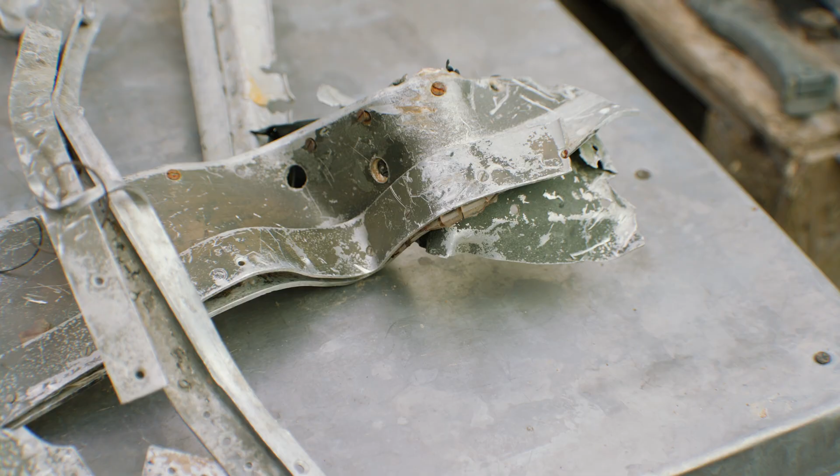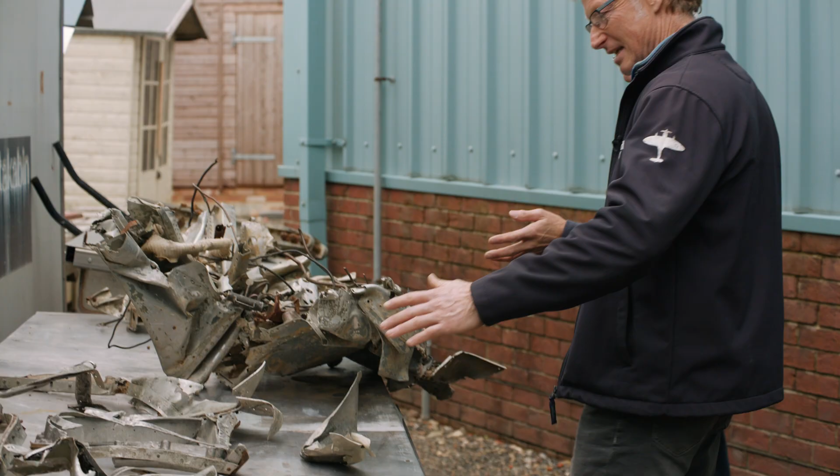If you look out here, Parky, we've got just a few bits. We've got bagfuls of it round the corner, as they say, but there's a few bits we've just laid out here of the recovered salvage parts of MJ444, bits which will be recognisable to you, hopefully. As you can see, you've got the complete surround here of the front armoured screen, the fairing with the de-icer bar, the fairings on the side. Look at the paint on that. It's amazing, isn't it? Perfect, isn't it?

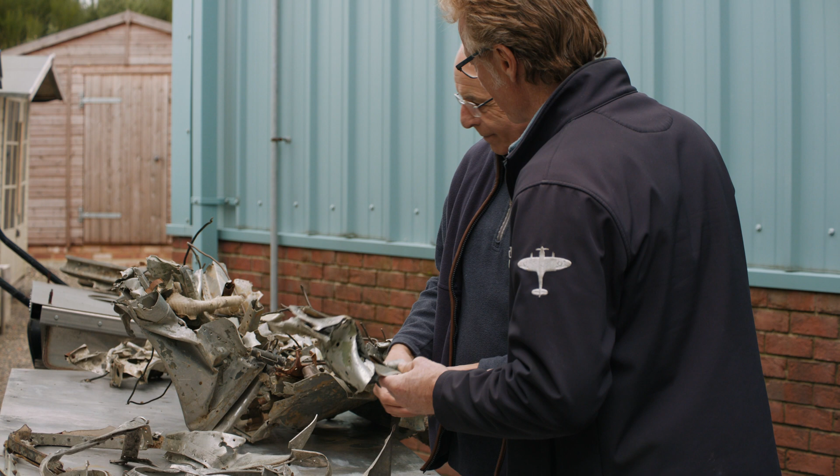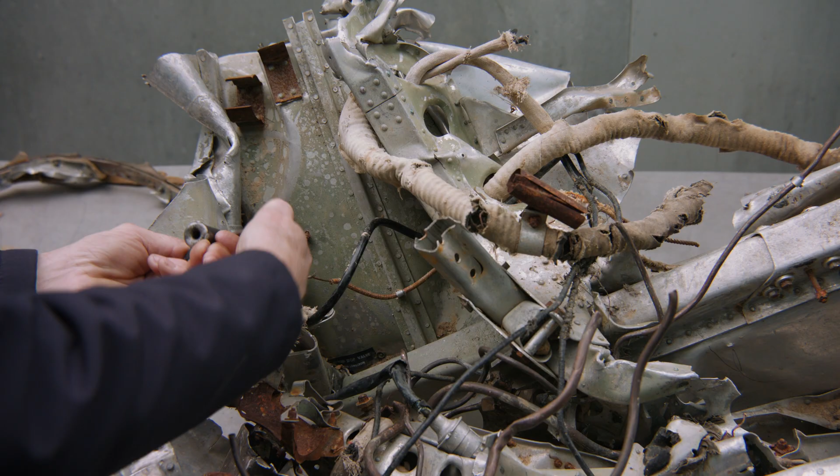Incredible. And some of the fixtures and fittings on here, like the armour plate there, you'll be able to use. Yeah, we'll straighten that end out. It's armour plate. It's almost auxiliary tertiary structure by today's standards. No one's going to be shooting at you. So things like that will go back into the rebuild. And here this is the strap. That's the harness release. That still works. The harness release still works. Yeah, that'll all be taken off. Reuse. Yes, we've got all that.

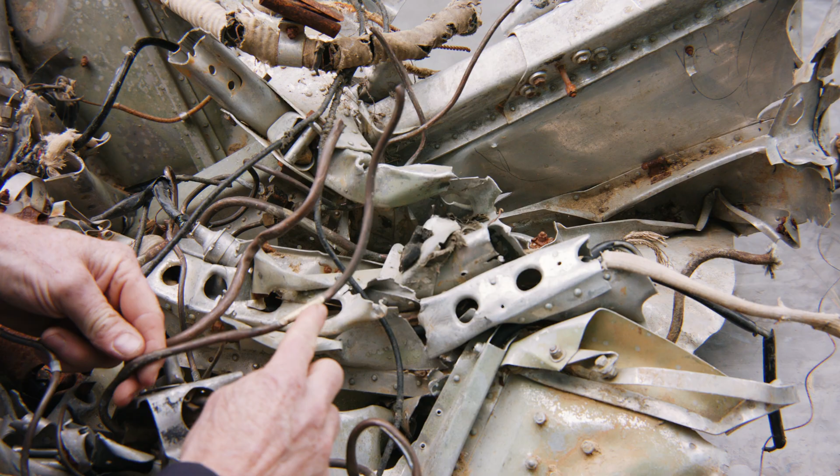We've got parts of the de-icing system controls. There's clips, brackets, mounts, the bushes from where the two bits of datum longeron meet. We'll take that apart. Go into the rebuild, rather than remake bushes. These are perfectly good. And this little plaque here, for example. Yeah, we won't be doing the systems, but when it comes to that, these little plaques can be desoldered and put back onto the new things.

Even bits of the top hat structure like that will all be stripped off and reused for the cockpit side stiffeners. And there's no reason why you wouldn't. It's in perfect condition. There's lots of little plates down there, stop valve things. All those will be taken off and reused right the way through this and the rest of the structure. This is the bit of the bulkhead. Some of these parts you can see we've already taken off. Some have already been drilled off recently or are already incorporated in the aircraft, into the structure. And more bits will be when we get to that point as well.

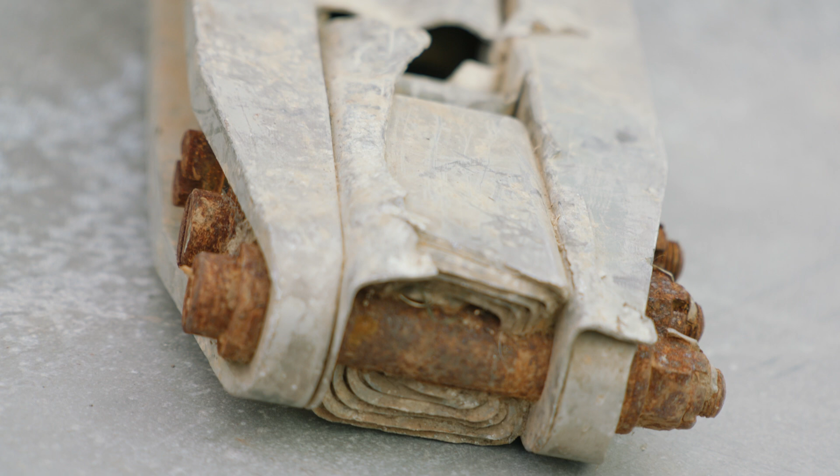And then that is... This is a piece of the original carry-through spar. It is, and you can see the laminates there of how the actual wing spar is made. That is the original, you can see exactly where it got its strength from. And then the 3 bolts, and then there would be 4 beneath that. Yes, and on the upper spar, we have managed to get out some of these spacer blocks, which again have been put back in already into the replacement restored frame 5 that we've already done in the jig. Just so wonderful to see, isn't it? Well, it's all about trying to incorporate as much originality and authenticity as we possibly can.

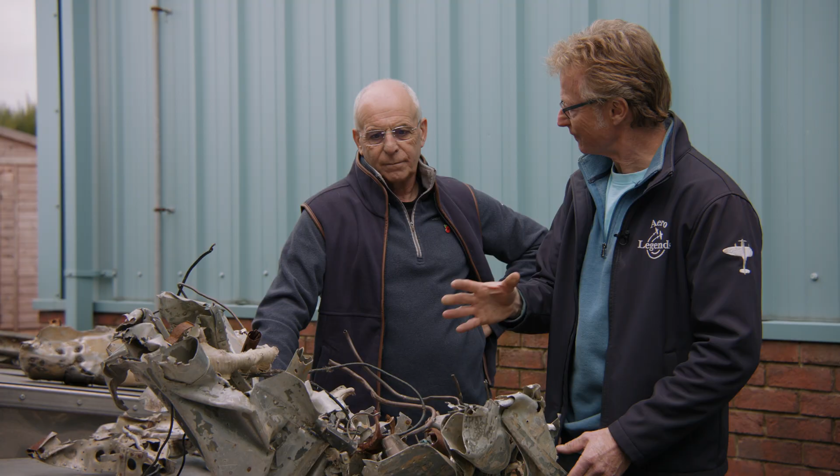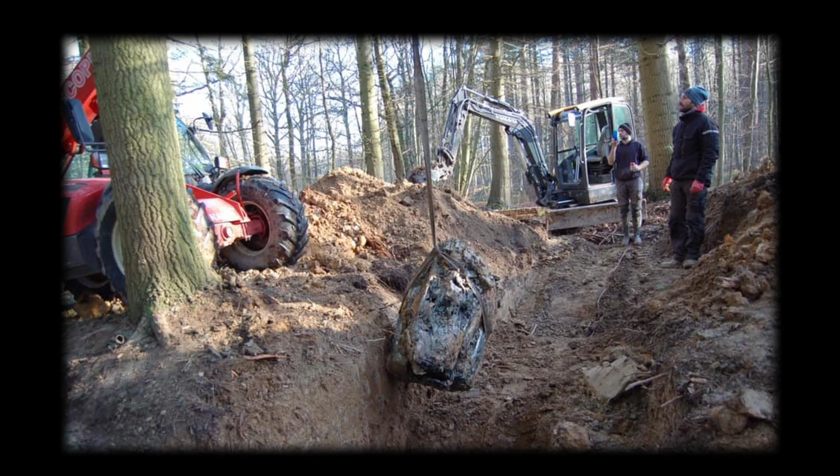I can see here, Steve, there's Belgian mud on the panel there. There is indeed, residue. And MJ was in the ground for, we think, 73 years in Belgium. Do you know whereabouts? Well, it was not far from where it ended up in the museum, which was at Florennes, where they have a Spitfire 14. The excavation was carried out by a local guy who lived in a village and was told about an aeroplane. He didn't even know it was a Spitfire, let alone MJ444. He carried out the excavation. I won't use the word amateur, but he didn't really know what he was doing, didn't know what he had.

Luckily, the guy that was involved with the display in the museum got to hear about it, retrieved the parts, and then realised what he had. Then it became slightly more public knowledge. A very good friend of ours, a good contact in Holland, who knew the guys in Belgium, then got involved, and through various phone calls, emails and negotiations, we managed to end up with the remains that you see today, and that has led to where we are. Yeah.

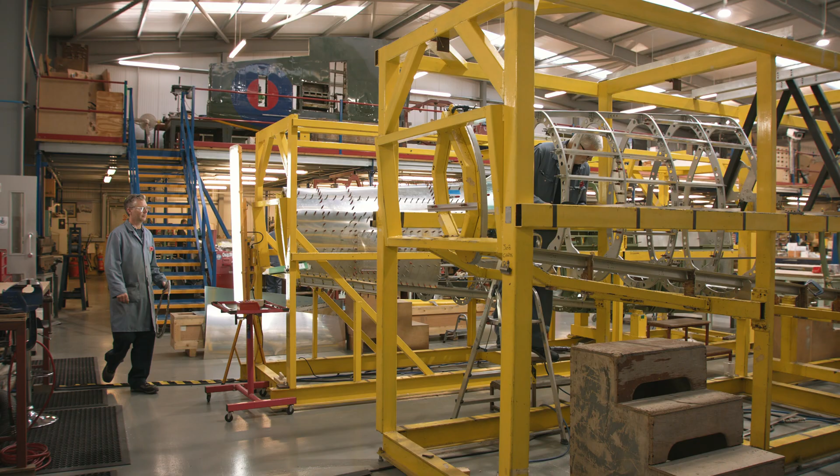So Steve, here we are inside the noisy machining shop where they build Spitfires. So tell us about the place. Well, we've been in this hangar now for just over 10 years. We were originally on the other side of the airfield, and prior to that we've been in smaller and smaller industrial units. We started in a little 700 square feet one many years ago, back in 1986.

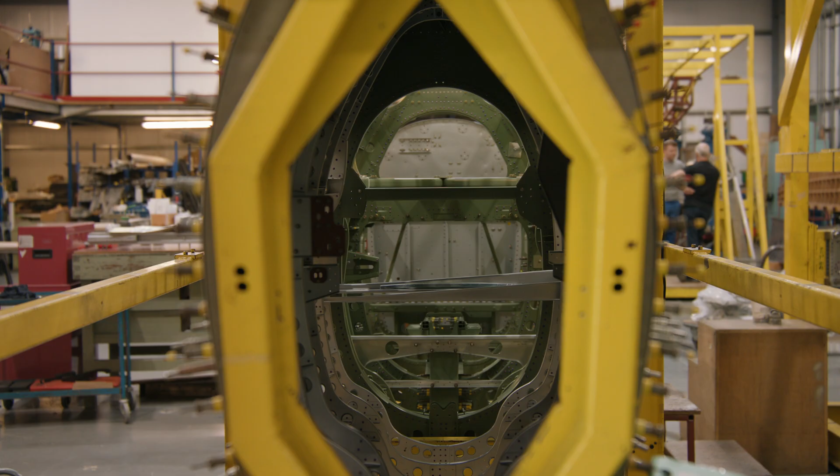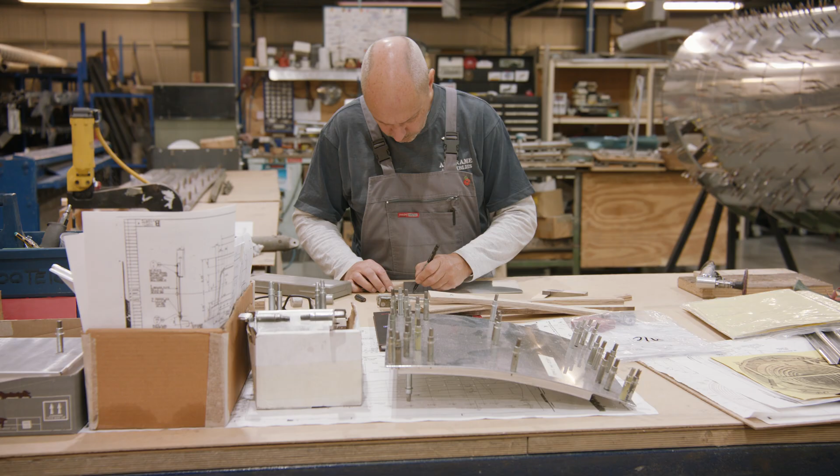And as you can see, we've got a couple of fuselages on the go here, wings over there. Just to make a bit of a change to the normal pattern of stuff, we've got a Typhoon fuselage going together. Yeah, it's great to see a Typhoon here as well. Well, it's something different. I mean, we don't just do Spitfires. Predominantly it's always come back to that over the years.

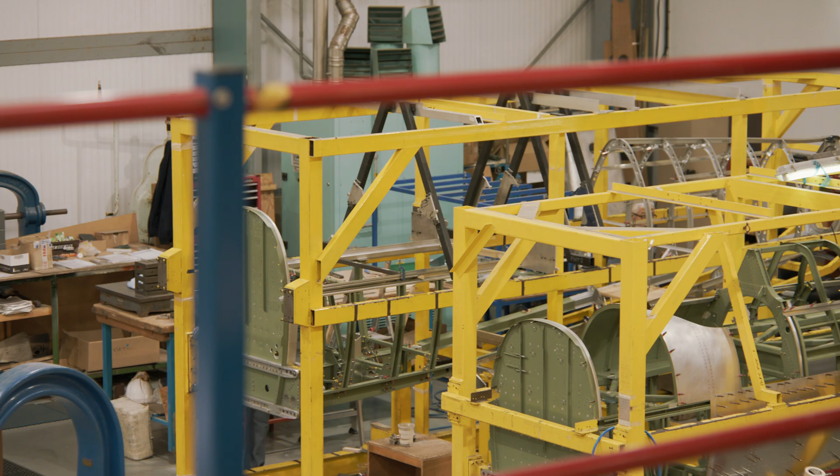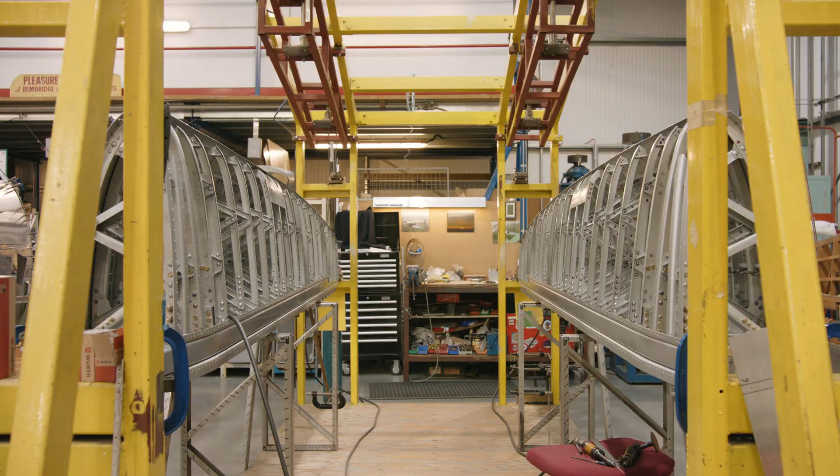I guess MJ444 is down there somewhere. Which one is she? It's the second jig over from where we're standing, just behind the slightly more complete one, which we're doing for another client, started earlier on in the year. And the leading edges of the wings of 444 are over there. And then the fin unit is just being done down here as well. So we've got the three major components going on, with a few loose parts scattered throughout the workshop on the fitters' benches. Should we go and have a look? Yeah, let's go down.

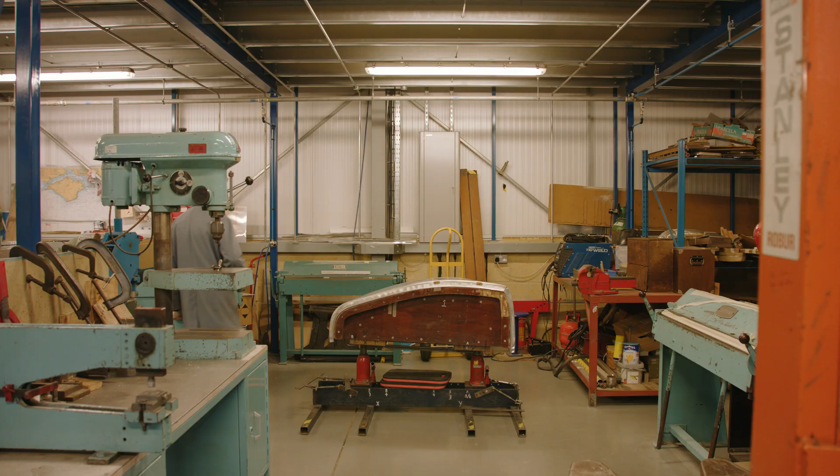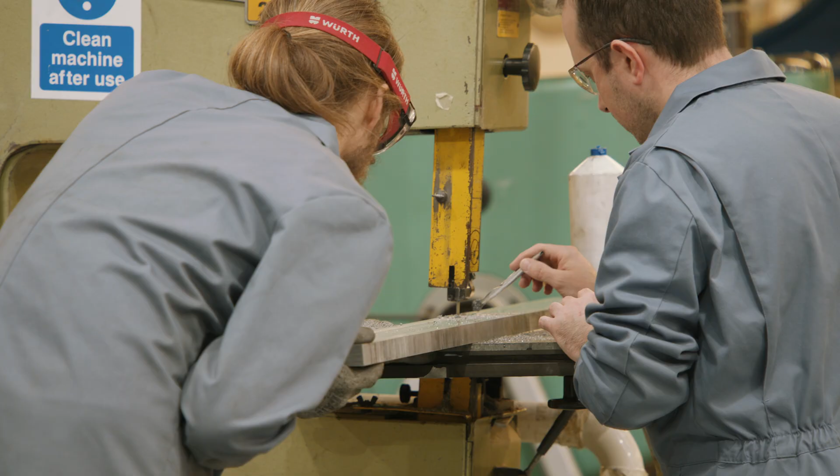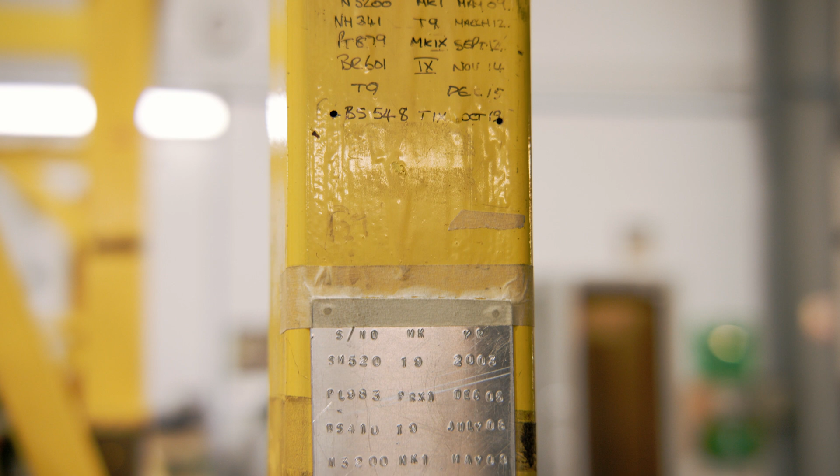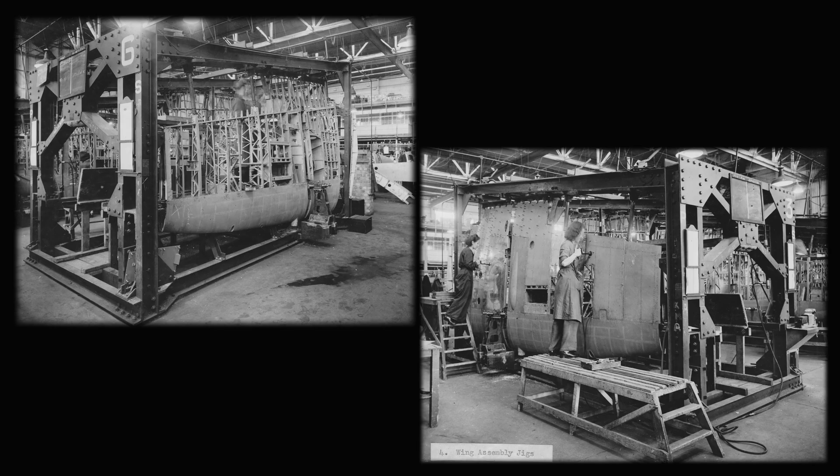So NH341 Elizabeth was built on this jig? Yeah, one of your other aeroplanes, we did that one back in March 12. Yeah, that long ago. And this jig, this system of being built was pretty much exactly as it was in the war, same principle? Same principle, oh yeah. If you look at some of the old black and white Supermarine factory photographs, there were rows and rows of these jig fixtures. This is an 80-year-on leap into the future, but it's exactly the same methodology. And you'll also find on the other jig your other aeroplane.

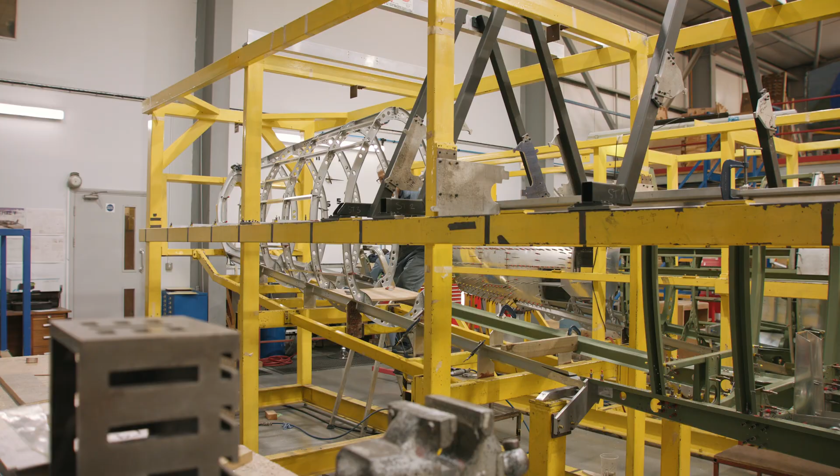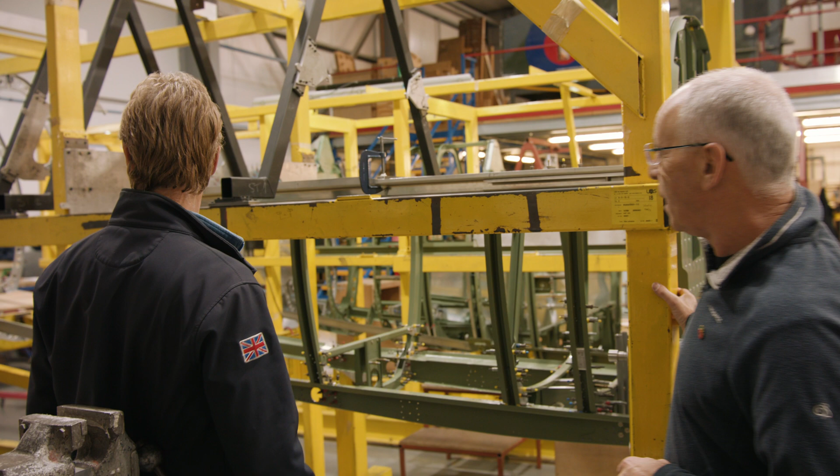And here she is. She's definitely taking shape. Yeah, it's just starting to get the basic frames, it's a Spitfire, can't you? It's just starting to get that form now. Yeah, it's not really until the skins go on, as they are with the next door one, that once you can't see through it anymore, then it starts to take the form far more.

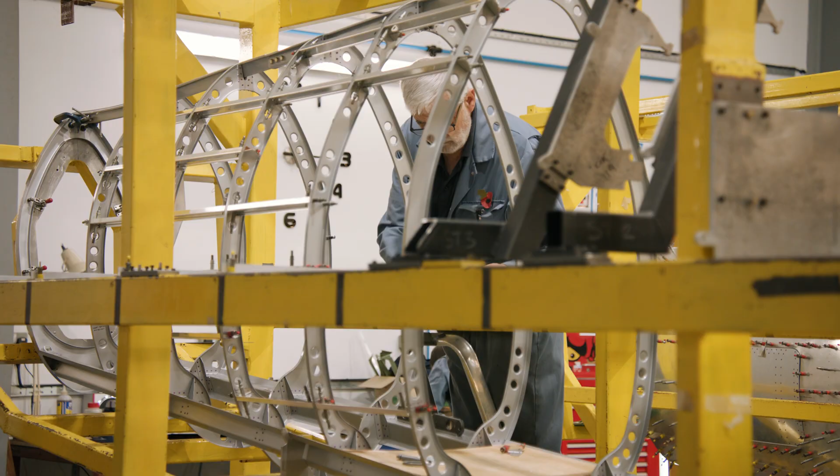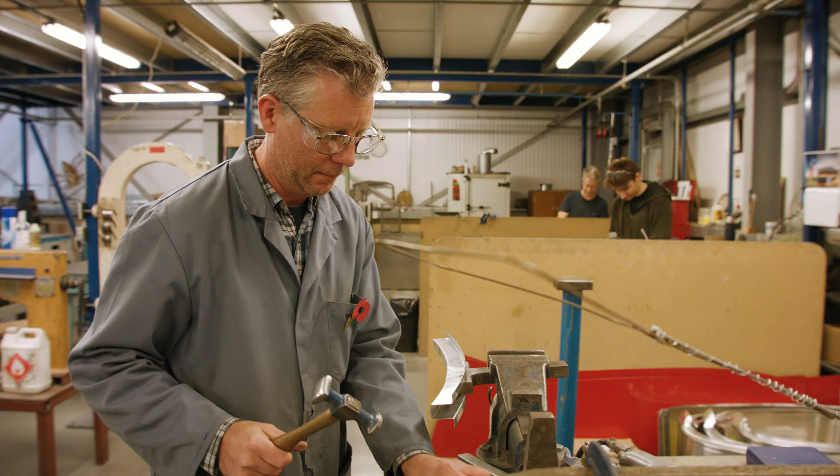And how long has it taken for her to get to this stage? She's only actually been in the jig probably for about 3 or 4 weeks since we got frame 5 in. But the hours, obviously, the last few months have been getting all the frames made separately in the layout boards on the bench, because all that has to be done as preliminary before you can start to load the jig up with the frames.

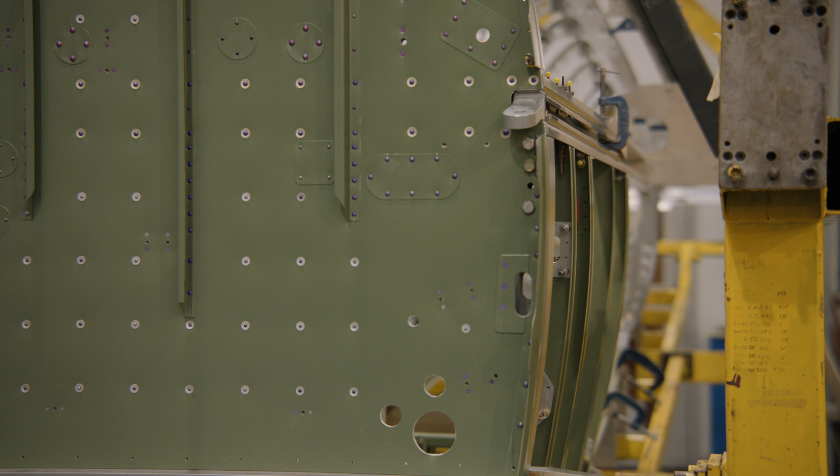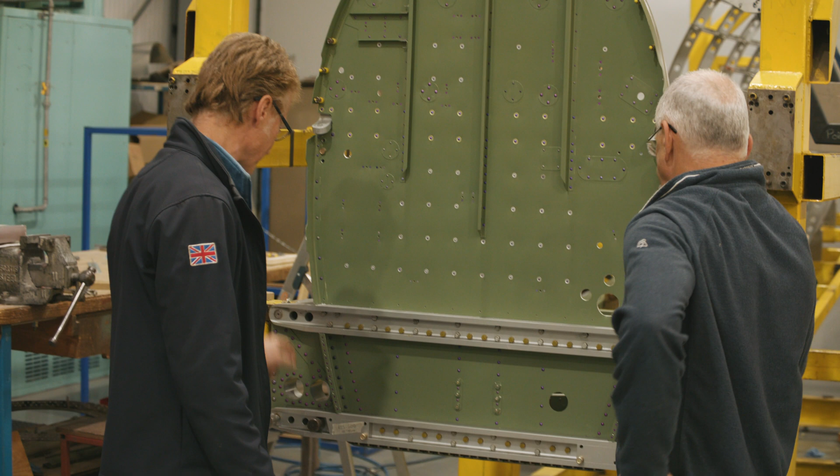And then frame 5, the heart of the aeroplane, the main bulkhead. Everything centres around this frame. Number 5 frame, the wings attach, the engine bearer picks up at the front, so everything really hinges around the heart of the aeroplane. And it never ceases to amaze me that 7 nuts and bolts hold the entire wing in place. The upper spar and the lower spar of the wing hold on by 7 bolts. It's just a big multi-pin joint that was amazingly effective.

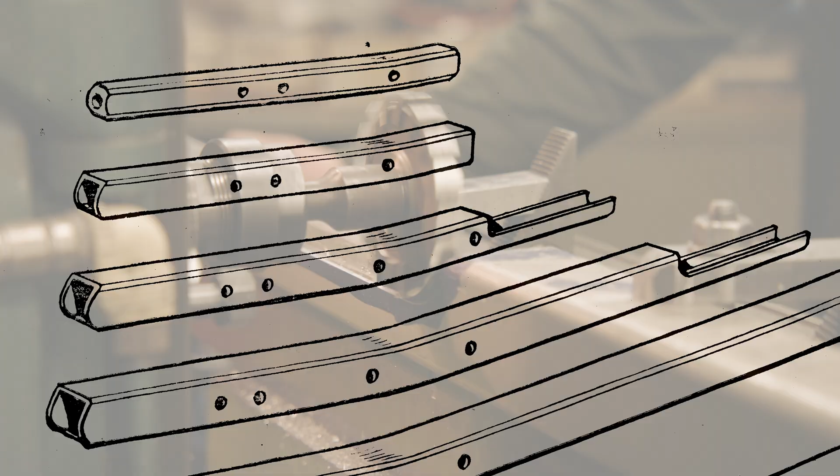Amazing, and you think of the weight of the wing and then multiplying that weight by 6 times if you pull 6G, is held on with such a clever design. And a lot of the secret of it is in that multi-layer telescopic leaf spring type spar, which was really the genius that Mitchell came up with, clamped onto this relatively simple joint, and historically Spitfire wing failures were tiny. You hear stories of Messerschmitt 109 wings collapsing, but not this.

This is such a strong joint. I remember Dick Melton at Charles Church Spitfires telling me years ago, the frame 10 joint at the back is just a single pin. On more than one occasion, that pin had been missed out in maintenance and major servicing, and the aeroplane had flown and had been okay. Just held on by the front. So nothing holding the back of the wing. People had noticed it moving and thought we better look at that. No pin. So it says something, doesn't it?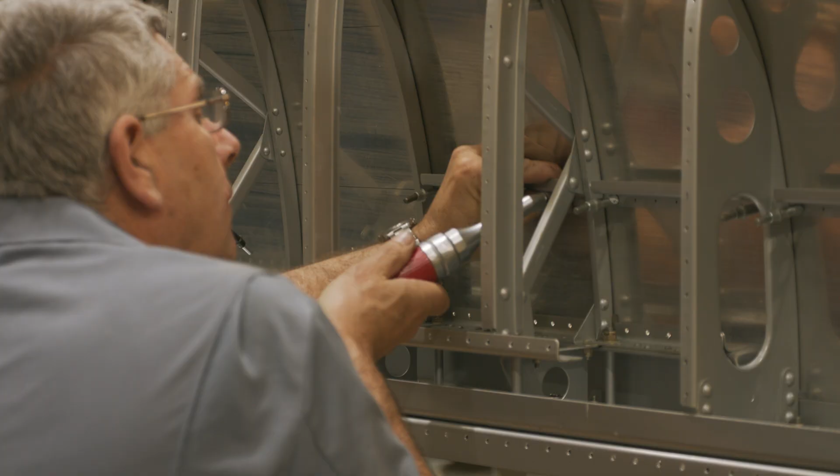It really does. Should we go over and have a look at the wings, where they get bolted onto? Yeah. So here the wings are, Steve. Yeah, these are the D boxes just going together now. We've just finished doing the leading edge skins, the big double curved skins. They look a bit weird at the moment because they're actually upside down, but they'll be turned round.

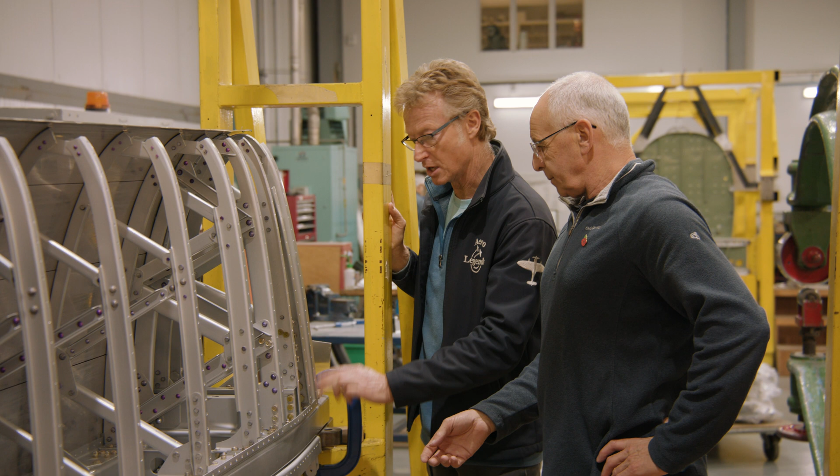And this simulates the frame 5 that we saw on MJ. It does, yeah. And then these are the lower and the upper wing spars. These are ground jig plates, which replicate the bottom of frame 5, the bulkhead. And when it's turned the other way up, in a couple of weeks' time, all of the holes will be filled. This is just a holding device at the moment. They've got to be fairly accurate. Oh yeah, extremely accurate, which is why they're ground plates.

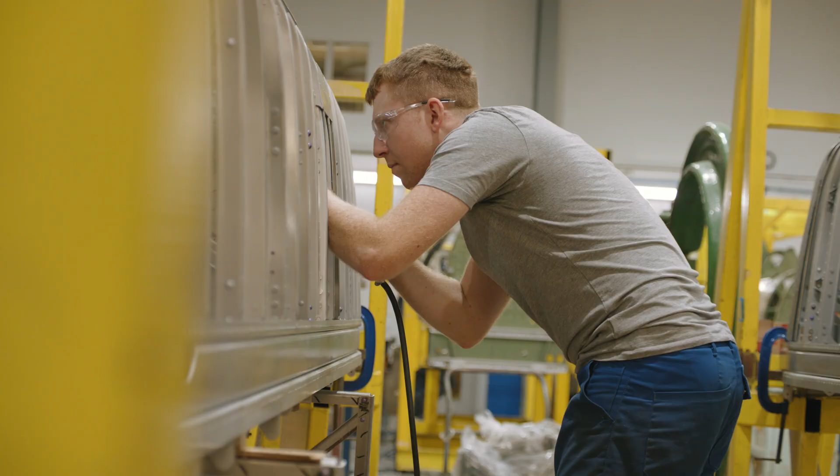How long has it taken for these leading edges to be? Both of these have been in the jigs now for probably about 4 months. Yeah, a lot of work. Well, it's such a complicated design, isn't it? With the beautiful elliptical wing. I mean, we try and carry a set in stock, but just to actually make the spars, which is a very complex process, it's about 3 months' work to get them cut in, to get them in. And we are the only company in the world that actually do Spitfire spars, approved to do so. It's a very lengthy, complicated process.

And the strength of the spar actually gets thinner because there's less. Yeah, the laminates, the cutouts go. So it's heavier, stronger here. You start with, at this end, the 5 different size tubes interlocked with a solid bar that goes to here. So at the dihedral it locks, and then as it goes staged outwards, the cutouts cut out. So I think I saw one over there.

It gives it the flexibility, as we mentioned earlier, almost similar to a leaf spring effect. Immensely strong, but very flexible, and the secret of the aeroplane. And look at the thickness of the wing compared to other aeroplanes of the period, which were almost double. Hence, it was so fast. Exactly. Yeah.

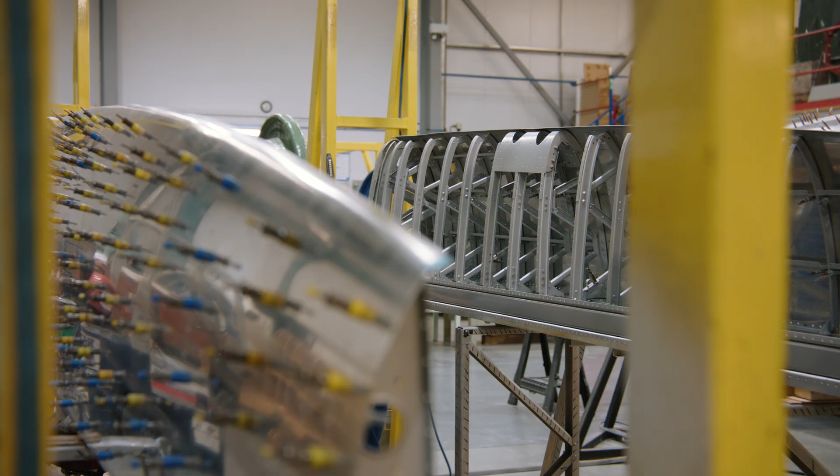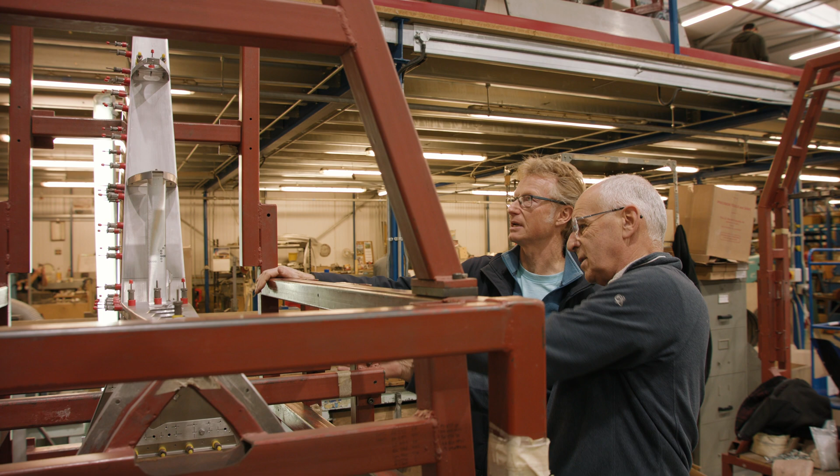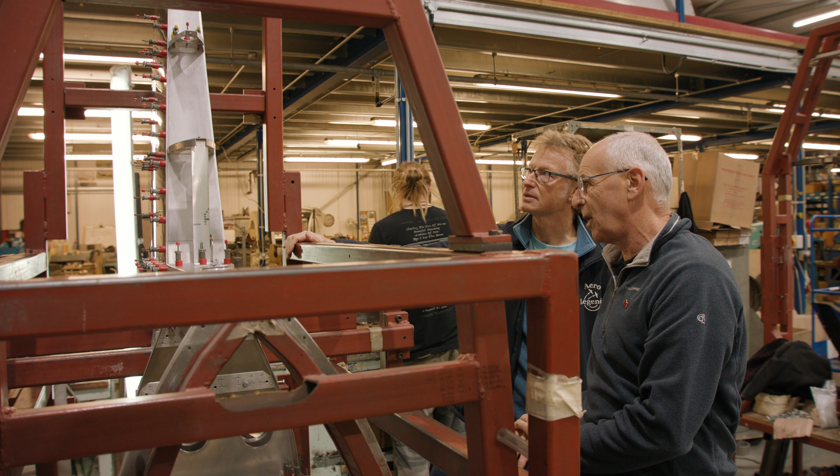This is the vertical fin unit of MJ, which is just starting to go together in the jig. There's a lot going on the fin unit. People tend to underestimate. It has to fit onto the fuselage this end, rudder has to be all set this end, tailplanes in the middle. So a lot going on in what people would think is a fairly small part of the structure, but quite a complicated one. But we did have a brilliant idea earlier on.

Yeah. So as this is open and is being worked on currently, we thought perhaps you could drill a few holes for us. Me drill the holes in the... Have a go, yeah. Is it expensive? It's not that expensive, and yes, it is expensive. But our thought is, what could possibly go wrong? I'd love to. Give it a go. Steve, could you look after our esteemed visitor?

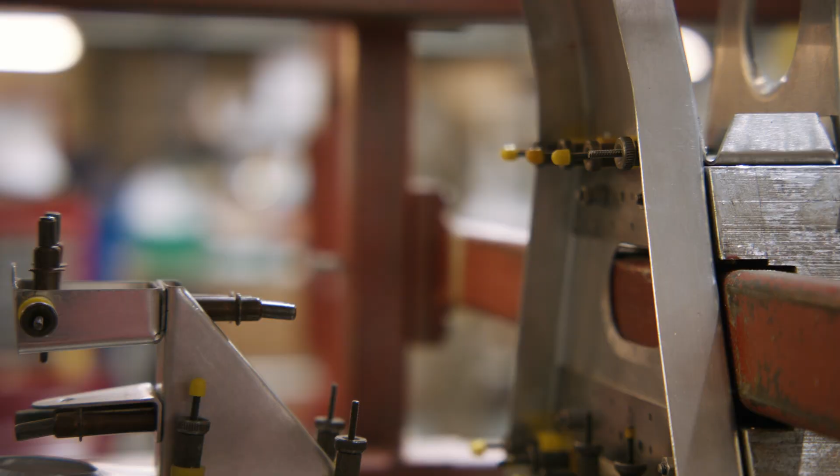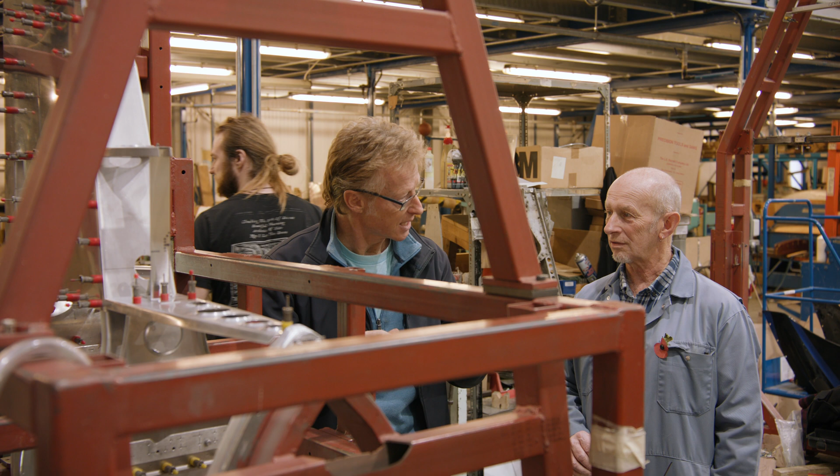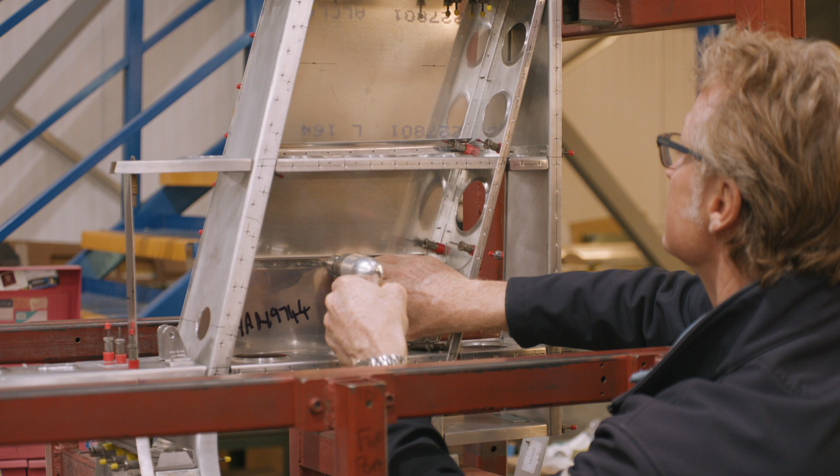That's it, now you can put the other half a dozen in. And you can do it all in one now? Yeah. I guess if you're feeling confident, you can do the next one up.

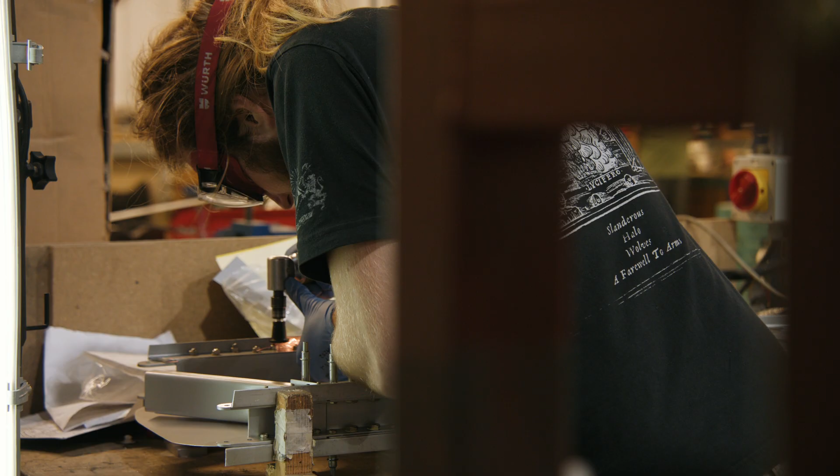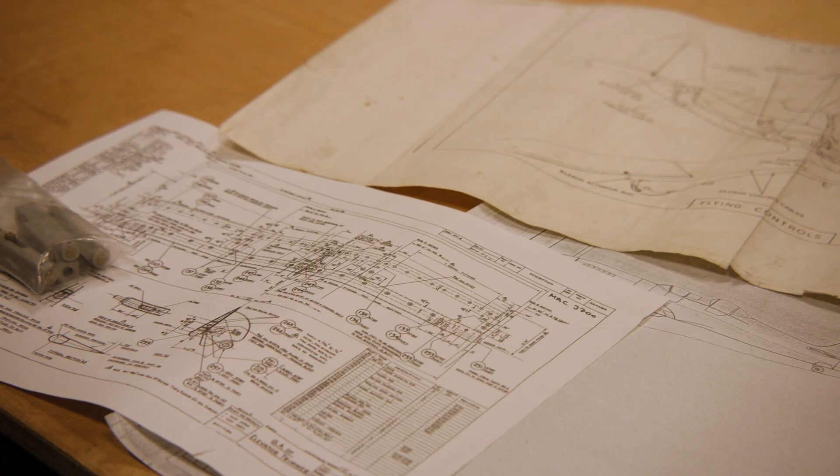Would these be referred to by the guys on the workshop regularly? Absolutely. Everything we do. Although we've got tools, layout boards, jigs, templates, we always check to the drawing because the drawing is the gospel. And although everything up here we've got paper copies of, it's all done now on computer terminals, and we have a remote terminal down in the workshop just underneath the window here, where all the boys, whatever they're working on, wing, fuselage, tail, cowlings, all the drawings are on the computer, so if they need to check a dimension, a thickness, it's a constant referral to the original drawings. Got to be right. Has to be right, and it's the only way to do it.

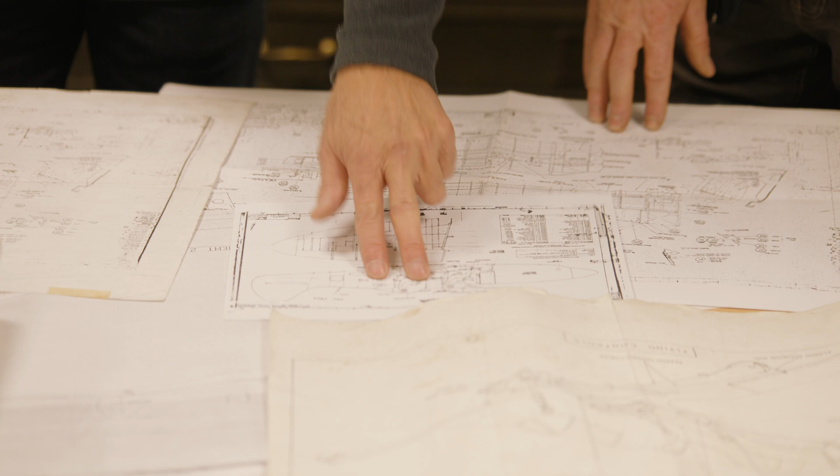It was very clever, managing to squeeze the second cockpit into a single-seat fighter. It was, yeah. How intricate the detailing was, that they managed to make it work. Well, the conversion basically is moving the front cockpit forward 13.5 inches, and then slotting the rear one in behind. A modern misconception is that they built these aeroplanes in the factory, where they didn't. They actually bought back a load of existing single-seater Mark 9s from the RAF and then converted those.

Well, that was great to see MJ444, as I'm now going to call her, being rebuilt. So many of the original parts are getting put into the new Spitfire, and she's definitely taking shape.